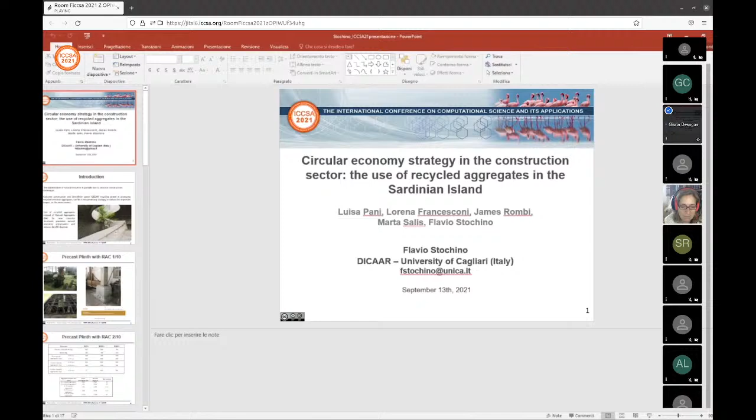Thank you very much, Professor, for the presentation. So, first of all, the co-authors of this work are Luisa Pani, Lorena Francesconi, James Rombi, and Marta Salis. We all work at the University of Cagliari here in Italy, and I'm glad to present this work at this very interesting conference.

So concrete is the most common construction material, and for this reason, the deterioration of natural resources is also partially due to its use. However, concrete construction and demolition waste recycling can be used for the production of recycled concrete aggregates.

Finally, of course, if we use recycled aggregates made with construction and demolition waste, we can save natural resources and we can reduce landfill disposal.

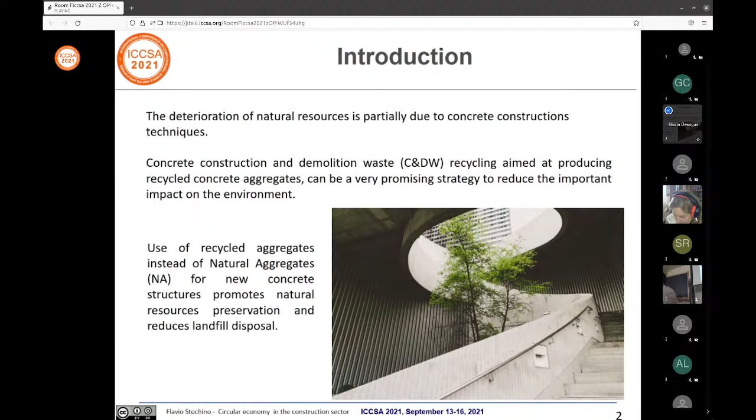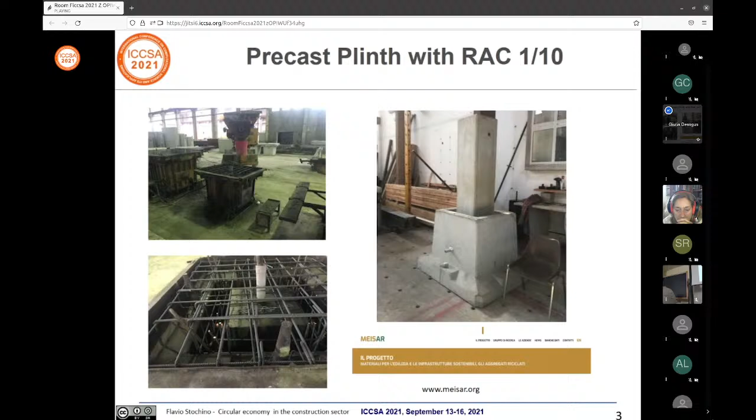In the framework of the research project MEISAR, funded by Regione Autonoma della Sardegna and coordinated by Professor Pani, we have tested the mechanical performance of a group of structural specimens, like reinforced concrete plinths, made with and without recycled concrete aggregates, in order to test the mechanical differences between the use of this material and the use of natural aggregates. In this slide, on the left, we have some details of the casting of the plinths, while on the right side you can see the whole structure.

We have prepared 3 specimens with different mix designs. The first one, labeled RC0, has only natural aggregates, so in this case we don't have any recycled aggregates, while RC30 and RC50 denote respectively a mix design in which we have 30% and 50% of recycled concrete aggregates. This is the replacement percentage of recycled aggregates instead of natural aggregates.

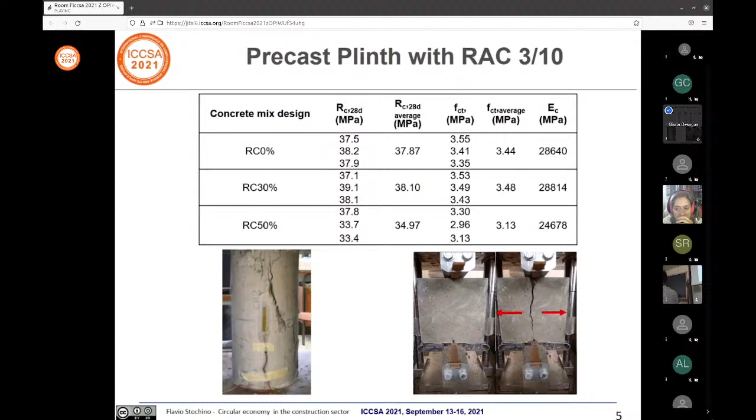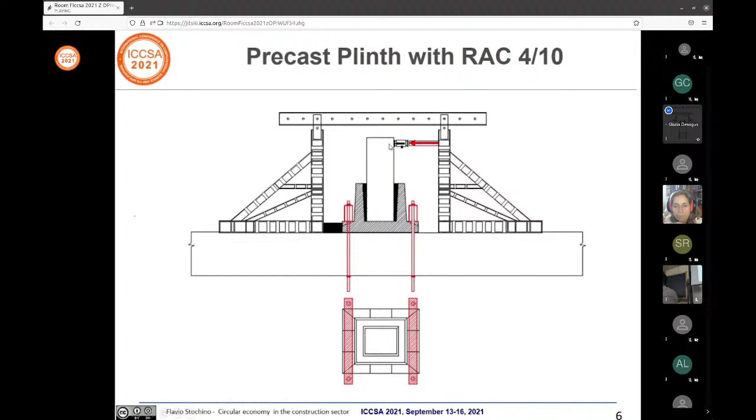Here you have some details of the experimental apparatus. The plinths are fixed to the ground, and there is an ordinary reinforced concrete column inside the plinths necessary to apply the load. We applied a horizontal force on the top of the column that is transmitted to the other part of the structure.

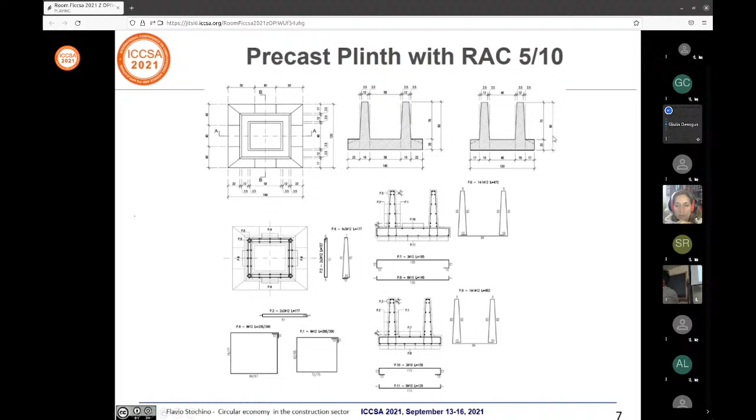Here we have the details of the plinths with some reinforcement bar characteristics, and the geometrical size of the plinths, which in plan are 1.4 by 1.2 meters, while the total height is about 90 centimeters. Here you have the position of the displacement transducer, shown by the red arrow, and the position of the hydraulic jack.

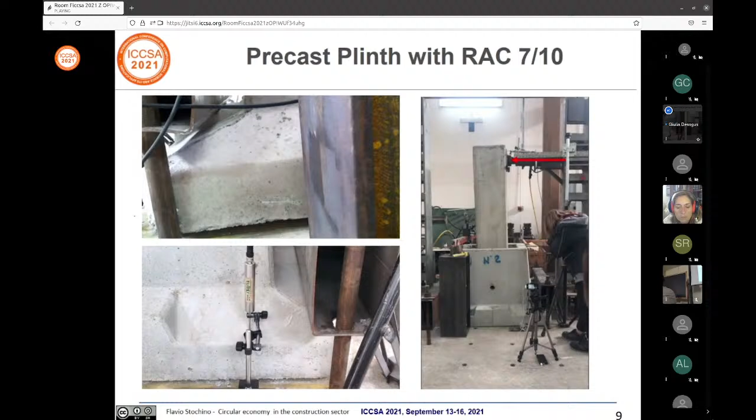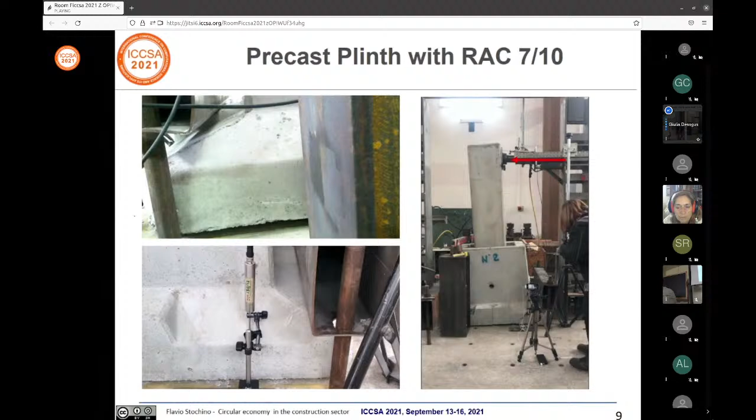Here we have a video of the experiments. On the right, you can see how applying and increasing the load on the column, we get an inclination and bending deformation of the whole structure, while the collapse mechanism is shown on the left, filmed from the opposite side. You can see crack propagation on the bottom cantilever part of the plinths, which became bigger as we increased the load until total collapse.

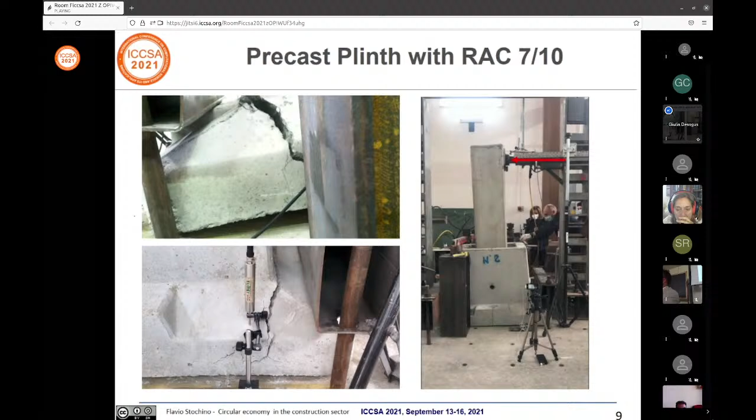There is no difference in the collapse mechanism for the 3 specimens, because all of them present the same collapse system. Here we have some quantitative comparison between the 3 specimens.

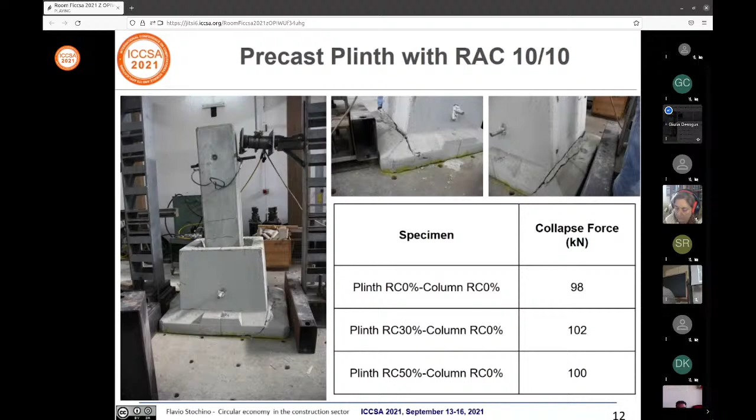Once we have proved that it's possible to use recycled concrete aggregates to obtain structural specimens, we can extend this and try to depict a general framework for circular economy development. As you know, we live on an island, which is a very interesting site to test circular economy, particularly for the construction market, where the cost of material is very low compared to the transportation cost.

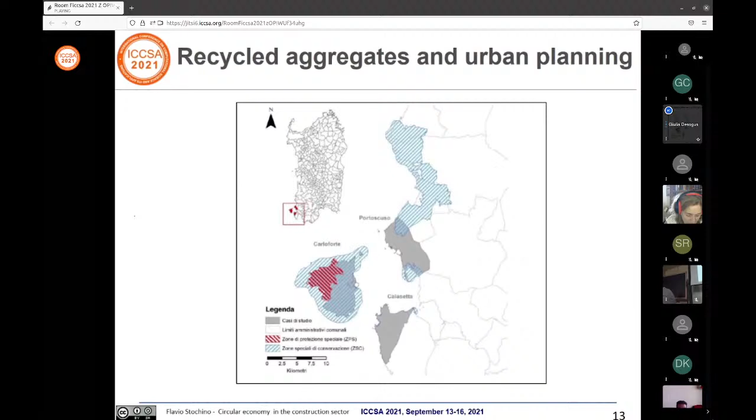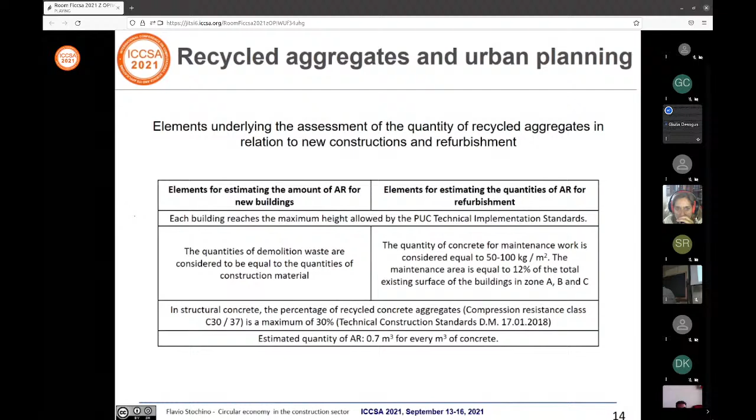Thank you. Okay, named Calasetta, Portoscuso, and Carloforte. In particular, we have developed a logical framework to analyze the urban development plan for all the municipalities, in order to determine, in the second phase of the analysis, what is the local demand for recycled concrete aggregates, considering new construction, refurbishment of existing buildings, and cycle and pedestrian paths.

You should take into account that these are three cities characterized by a touristic economy in which natural attractions are very important. In synthesis, for new construction it is necessary to have 2 tons of recycled concrete aggregates per square meter, which becomes 0.1 and 0.5 if we consider refurbishment and cycle and pedestrian paths respectively. In the bottom part of the slide you have all the details of the calculation.

In conclusion, potential application of recycled concrete aggregates in structural elements has good effects on both environmental and economic aspects. Imagine if the producer of precast plinths could use the production scrap as recycled aggregates instead of natural aggregates, saving money and also saving the environment.

We have proved experimentally that the presence of recycled aggregates as a replacement of natural ones does not lead to any reduction in the mechanical performance of the structures. Finally, we have shown a brief analysis about the possible recycled concrete aggregate demands of 3 towns in Sardinia, and we have calculated the amount of recycled aggregates that will be needed in this area.

I'm on time, Professor? Yes, you are. Thank you very much, thank you for the nice presentation.

The critical dimension, especially for island regions marked by resource scarcity, makes it very important to be able to use this kind of material in the construction sector. So, any questions from the audience, please?

I have just a consideration, if I can. Yes. So do I have to move? No, just a consideration.

I think that studying methodology to recycle materials is really important for the insular context, also because in this way we can speak about circular economy. Congratulations for your work, also because your specific field is structures, so there is multidisciplinarity in the session. Thank you, Chiara, you let me answer with this consideration.

As I was trying to express, it's very difficult for me knowing where to watch, because I don't know exactly - maybe this is the camera. Okay, so I was highlighting that for concrete, the cost of materials is very low.

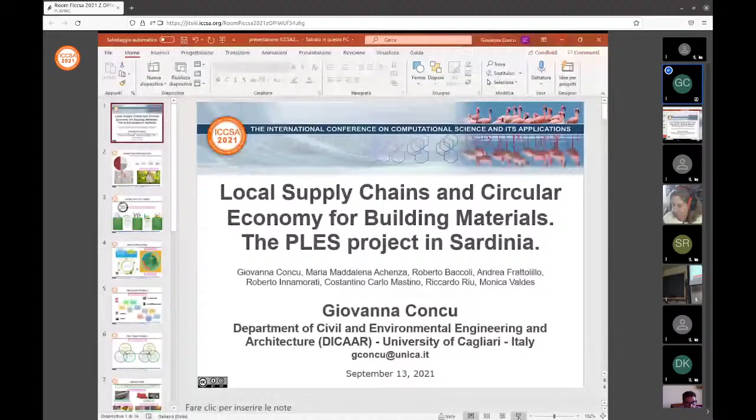I'm going to talk about the PLES project, which carried out a feasibility assessment of a local supply chain startup to produce building materials and eco-sustainable construction systems in Sardinia Island.

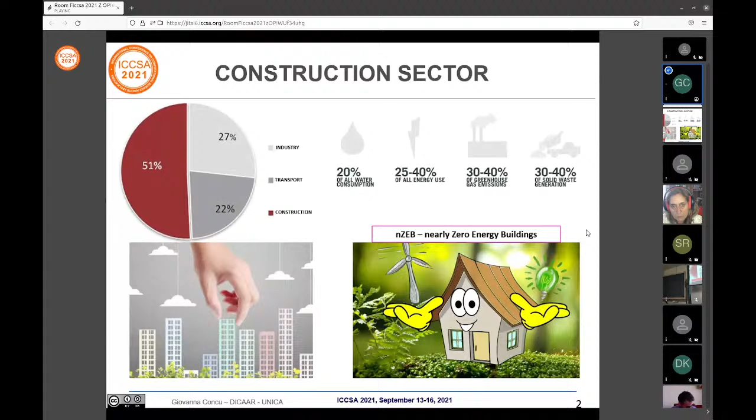I'd like to start by highlighting the impact of the construction sector on the environment. This sector currently is globally responsible on average for over 35% of the consumption of raw materials, soil, water, and energy, and for over 30% of pollution and production of waste. Moreover, all new buildings built in Italy will soon have to be nearly zero energy buildings, that is, buildings with almost zero energy needs.

In this context, the sustainability of building materials is of fundamental importance, and local supply chains take on a strategic role. The reduction of the environmental impact of a green building can be achieved with various strategies, including the more widespread use of eco-sustainable materials locally produced.

The resort to local short supply chains to produce building materials is particularly appropriate in a context of isolated economies, as Flavio highlighted, such as those existing in island regions like Sardinia. Many European islands are small isolated systems with small markets, so they are more vulnerable to the effects of anthropic impact, and must produce a considerable effort to implement strategies to reverse this situation. Therefore, it is essential that islands manage their resources sustainably to become increasingly efficient, self-sufficient, and to protect their environment.

Indeed, insularity could become an opportunity to implement self-sufficiency paths in the production and management of resources, to make the economy more sustainable. The PLES project fits into this context.

PLES stands for, in Italian, Prodotti Locali per l'Edilizia Sostenibile, in English, Local Products for Sustainable Buildings. It is a project funded by the local authority, Sardegna Ricerche, and it is based on the synergy between a multidisciplinary research group of Cagliari University and a group of local companies involved in various business sectors.

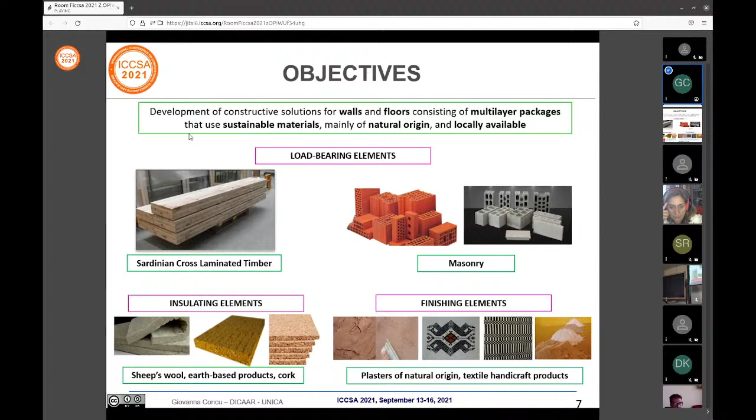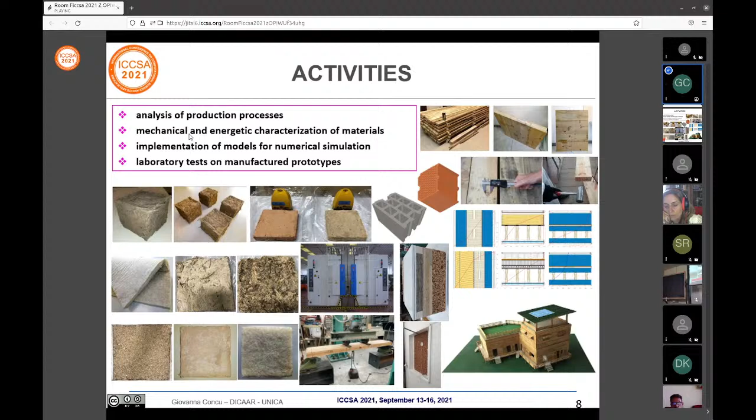The PLES project was developed through a series of activities you can see in this slide, which I will illustrate in detail in the next slide. The first was the analysis of the production processes, followed by the mechanical and energetic characterization of the materials involved, then the implementation of models for numerical simulation, and finally the laboratory tests on manufactured prototypes of the multi-layer packages.

The starting point of the project consisted in the analysis of the production processes related to the materials and construction systems considered. This analysis was run with reference to the life cycle assessment model and made it possible to highlight the consumption of energy, primary and secondary resources, and the emissions and production of non-recyclable waste. The impacts were assessed in terms of economic, environmental, and social sustainability, and the main aspects associated with both the production and marketing of the individual products were highlighted.

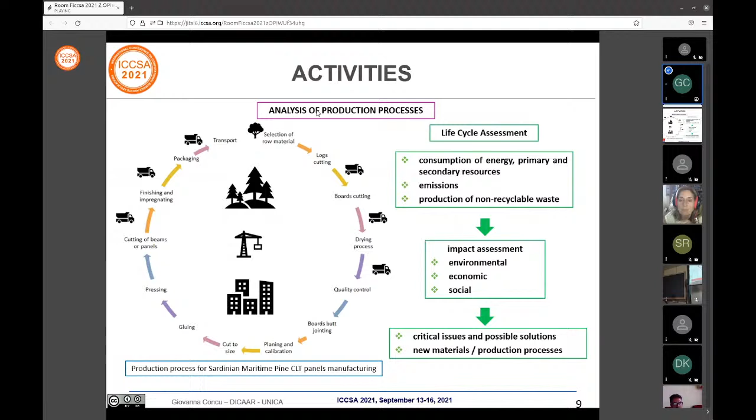This phase allowed, on the one hand, to highlight the main critical issues associated with the various production processes and to indicate possible solutions. On the other hand, to propose the development of new materials or new production processes, and the optimization of the already existing ones.

The project also involved the implementation of numerical models to simulate the performance of the multi-layer packages and of the single constituent layers. This activity mainly consisted in the development and implementation, by means of calculation codes and commercial software, of numerical models for the simulation of the mechanical and thermoacoustic behavior and the calibration according to the experimental results.

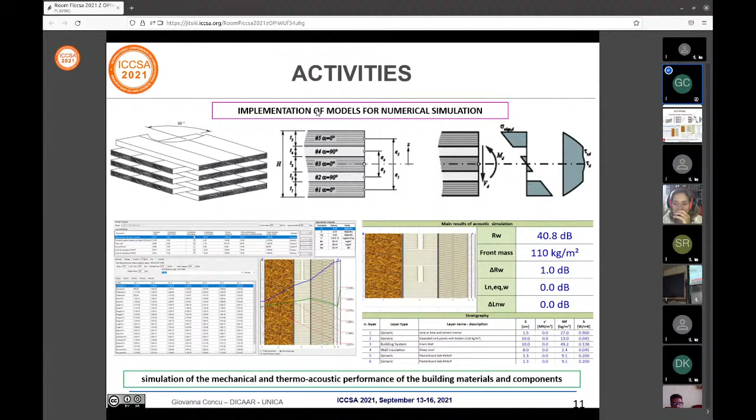The mechanical and energetic properties of the tested materials and construction systems tested during this last step of the project were also collected and implemented according to the procedures provided for compatibility with the Building Information Modeling Protocol. Through this coding, a database was created with the aim of promoting the marketing of local products and their use by designers and customers.

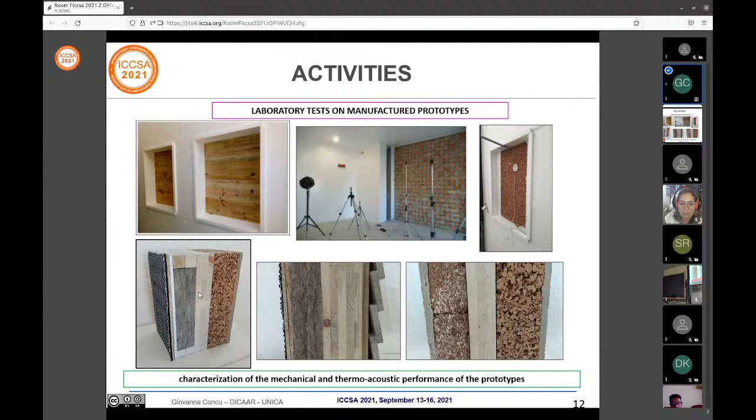2 minutes left. Yes, thank you.

Here are the results. The main results achieved by the PLES project are listed in these slides.

From a general point of view, the boost to the development of the Sardinian wood supply chain for structural use - all the timber used in Sardinia is now imported from abroad. Then the support for the diversification of the production and destination of traditional materials, such as sheep's wool, raw earth, and cork. The impulse to the development of the production sector of derivatives from vegetable fibers and of fabrics to be used in the construction sector.

The increased competitiveness and innovativeness of the artisan enterprises potentially interested, the development of new production processes, and the optimization of the existing production processes, also through the application of innovative tools and technologies.

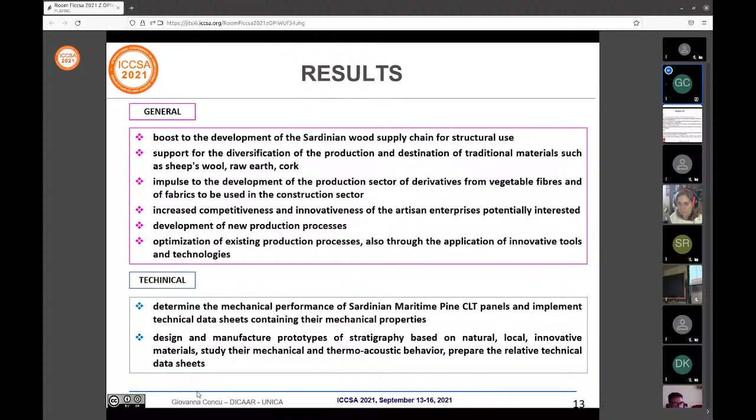From a technical, practical point of view, the project has made it possible to determine the mechanical performance of Sardinian maritime pine cross-laminated timber panels, and consequently to implement technical data sheets containing their mechanical properties, which can be used to encourage the production and use of this new material, and to design and manufacture some prototypes of stratigraphy based on natural, local, and innovative materials, to study their mechanical and thermoacoustic behavior, and to prepare the relative technical data sheets.

All the activities, the contents, the results, and the products of the PLES project have been implemented on a freely accessible dedicated website to provide a solid basis for the implementation in Sardinia of local supply chains for the production of eco-sustainable building materials.

In conclusion, the PLES project has represented the spark that ignited the start of a broader and more in-depth research to study modular vertical and horizontal closure systems for buildings, combining sustainable materials, mainly of natural origin and locally available. In addition, the project has taken a scientific approach to the intelligent and convenient use of local materials, both primary and resulting from primary processes, encouraging virtuous circular economy activities and enhancing regional material and human resources.

The project allowed the research group to define multi-layer modules that showed very interesting results concerning load-bearing capacity and physical performance, and the team is now continuing the research with the intention to define certified prototypes to be launched into the sustainable building markets. Thank you very much for your attention.

We thank you very much, Giovanna.

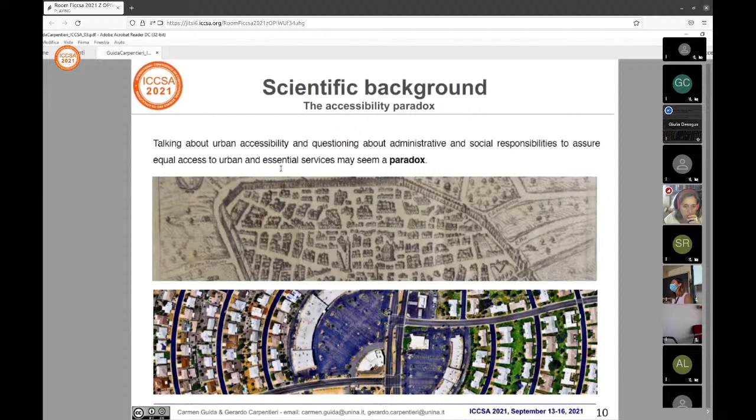Talking about accessibility for urban environments may actually seem a paradox, because cities were born to provide services and activities for a heterogeneous group of people. But today, talking about accessibility for cities is not a paradox anymore, due to social, economic and infrastructural crises that make the paradox only apparent.

Of course, the accessibility we refer to is not a place-based accessibility that just concerns transport and mobility matters, but takes into account the urban system as a whole, considering services and activities as well as personal and individual capabilities. These are some of the main definitions of the paradigm of accessibility.

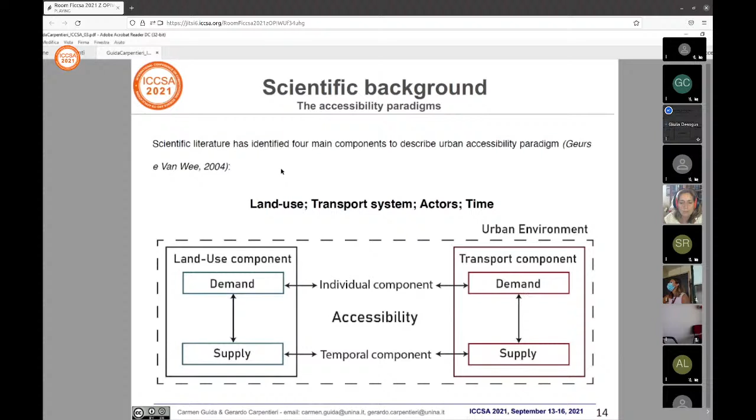We try to study accessibility measures, as a literature review convinces us that including accessibility measures in the urban planning cycle may be a good opportunity to make aware decisions and to monitor urban transformation towards aging people. There are four main components to measure accessibility: land use and transport system, both considering supply and demand, and also actors, considering individual characteristics of population as well as time.

These are some of the most known measures. We studied them and divided them into three main categories: contour measures, gravity-based measures, and utility-based measures. These are some reflections and thoughts that we try to summarize in order to build our own methodology.

One of the main traits is the significant support of GIS methods to analyze both the land use and the mobility component. On the other side, it seems that holistic vision seems to miss accessibility measures. Another important trait is the spread of gravity-based methods, both in academic and professional fields. According with the scientific background and our reflections...

We try to develop a new methodology based on the two-step floating catchment area method, developed by Luo and Wang in 2003. It is a gravity-based measure, and it consists of two different steps. In the first step there is a ratio between supply and demand.

Supply is the number of services available in a study area. Demand is the population or the users that want to access the service. In the second step, the methodology evaluates the total accessibility, considering all services available from the origin.

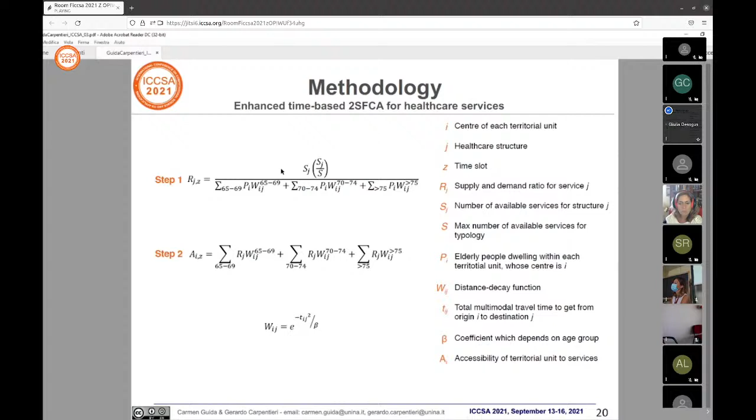Or the number of people that work in each structure or building. Another innovation: we consider a decay function to account for the different capability of elderly people to walk.

We consider a different walking speed in the evaluation of time. In fact, the decay function is a function of time for each age category. We consider, according with previous studies, three age categories: the young elderly, the medium elderly, and the old elderly.

Our decay functions range between 1 and 0. The maximum travel time that elderly people want to spend to reach a service is more or less 30 minutes for a young elderly person and 20 minutes for an old elderly person.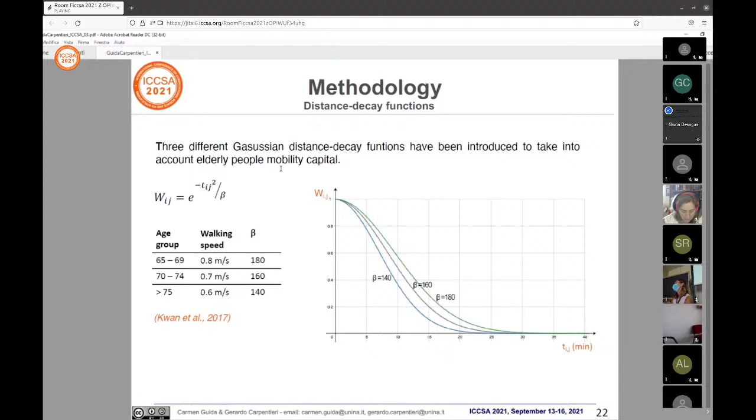For visualizing the results, according to previous studies by Transport for London, we propose a 10-quantile classification of accessibility.

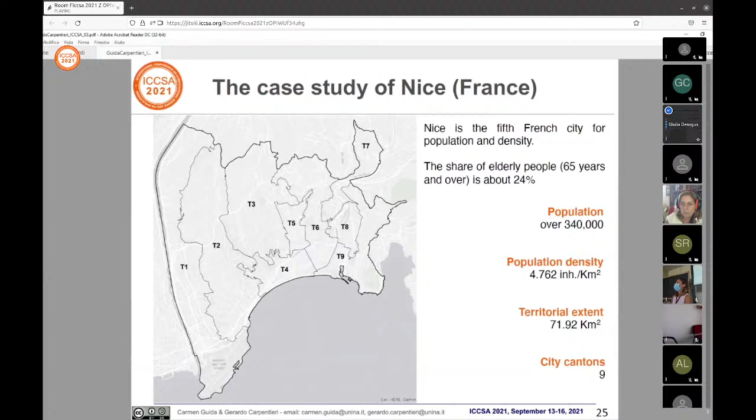We apply, in partnership with the University of Côte d'Azur, the methodology to the city of Nice in the south of France. The city is divided into 9 districts, and we consider the primary health services located in the city. There are 20 different buildings where the primary health services are located.

This is the distribution of elderly people in the city of Nice, and the local authority has invested in recent years to improve the quality of the health system for elderly people, developing a specific plan to analyze elderly access to primary health services.

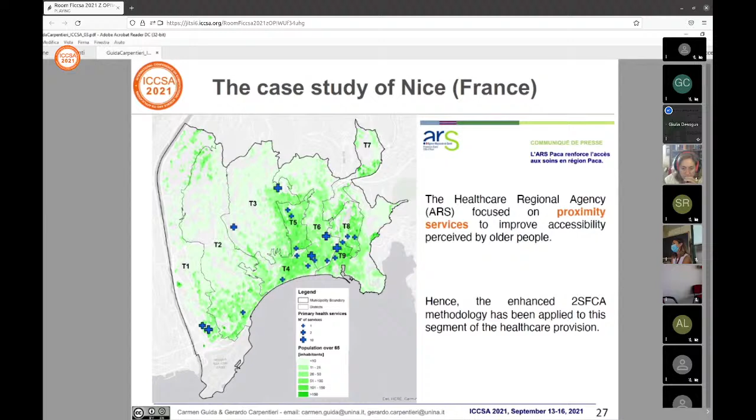So we apply our methodology over 3 daily time intervals. This is the morning scenario, with a maximum number of primary health services open, and with a maximum value of the transport system. On the right of the slide, there is the result for each district in terms of number of people and level of accessibility.

This is the afternoon scenario, with the same buildings open, but a changed transport system. And this is the last scenario, the evening scenario, where only 3 building services are available in this time interval, and there is a reduction of transport services.

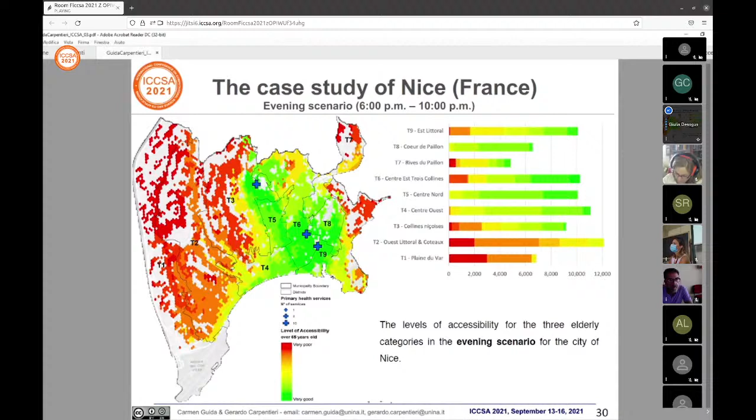It's possible to see from the map that the west-north area of the city has a low value of accessibility.

In conclusion, we'll present the main results of our research. One of them is the innovative feature of integrating accessibility measures with informative tools to support policymakers in identifying solutions to improve the quality of life of elderly people, also in emergency scenarios, and to quantify their consequences, including in what-if scenarios.

Another key feature of our research is the consideration of the actual mobility capital of the elderly, considering walking speed, transit, and distance decay function.

The application of the methodology to the case study of Nice proved that urban planning tools and decisions by policymakers may be guided by accessibility measures. Further steps of our research will integrate this method within a WebGIS, a spatial server, in order to visualize and elaborate data in real time to support policymakers.

For further insights, here is a book we published last month, at the end of July, which takes into account this research and other parts of it, including the application of some of the methods we presented today, in its latest version, to the cities of Naples and Milan.

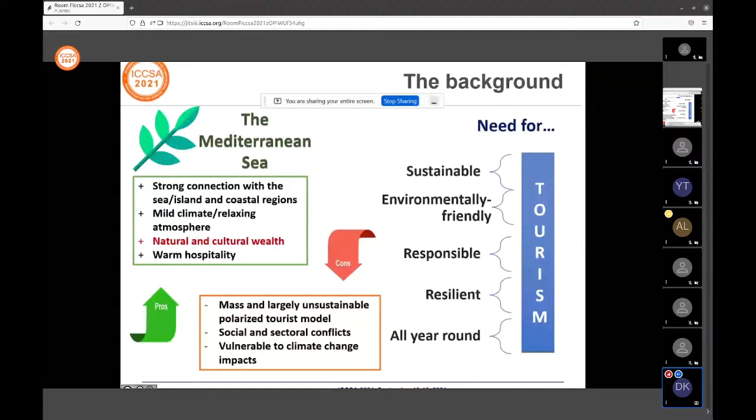This calls and prompts call for immediate action towards a more sustainable, environmentally friendly, responsible, resilient, and all year-round tourism model. The answer to these needs and the special focus of this work is diving tourism as an activity falling into the maritime tourism alternative forms.

It is an evolving niche market, counting more than 27 million certified divers between 1967 and 2018, falling at the same time to a more personalized, sophisticated, experience-based tourism form, a need that has already been expressed by both the demand and the supply side of the tourism sector.

It is taking place mostly in sites with a natural and cultural wealth, and here is the underwater cultural heritage aspect that is a prevailing feature of the Mediterranean underwater world, and the special focus of our research. And at the same time, it's an all-year-round activity with significant potential.

This potential is not yet fully exploited today, especially in the Mediterranean islands. But...

What is underwater cultural heritage? According to the definition, it includes shipwrecks and plane wrecks, mostly the ones that are related with historical facts and events like World War I and II.

Artifacts, structures and deposits buried or submerged, originated from human activities on land. Artifacts, structures and deposits originated from inhabitation or use of coastal zones.

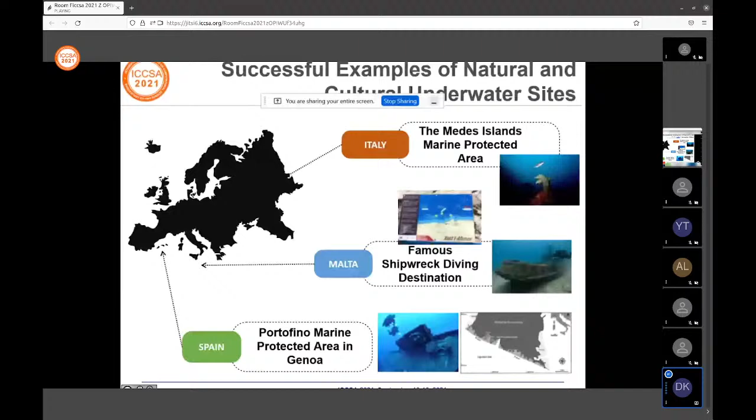Moving forward to the Greek example, Greece is one of the most coastal and island countries in the world, as you can see in the slide. At the same time, it hosts significant underwater cultural heritage sites, such as 2,000 wrecks, as an outcome of Greece's strategic geopolitical position and its role in World War events. Although this underwater cultural heritage, both natural and cultural, is highly acknowledged, it is not fully exploited today.

This is mainly due to the fact that for several years, diving activity was restricted, rendering accessibility of many potential diving sites totally prohibitive. In 2003, a ministerial decision characterized all shipwrecks submerged for over 50 years as monuments, a fact that increased the inaccessibility of the sites.

The situation steadily started to change after 2005 with the introduction of accessible underwater ecological parks, as well as a recent law in 2020 defining diving tourism as one of the main special forms of tourism to be developed in Greece. Unfortunately, till today, because it's a very recent regulation, the results are not visible.

Although accessible underwater ecological parks seem an important institution to ensure protection and sustainable exploitation of UCH sites, there are only 4 established till today in Greece, attracting the interest of many visitors. Here we name the Methone Bay in Sapienza Island, the Navarino Bay in Peloponnese, the Pavlopetri in Laconia, and the UAP at Alonissos in the North Sporades, which I think is the most well-known today.

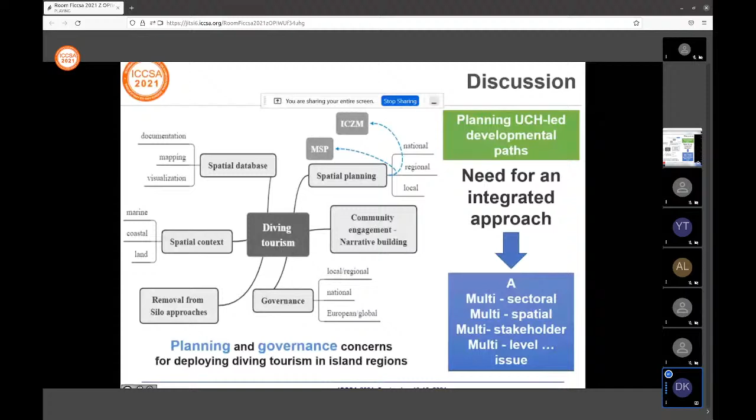To conclude, diving in UCH sites has attracted significant interest from a demand and supply side, being a driver towards local sustainable development based on a healthy and wealthy marine environment. UCH nature, being part of a complex ecosystem, the coastal and marine one, sets protection complex and in many cases a local issue of high concern.

Speaking of the Mediterranean, insular territories are already recognized as globally attractive diving sites, rendering the potential towards a more environmentally and culturally responsible, high-class, all-year-round and experience-based tourism model. The examples examined show a significant effort towards sustainable exploitation, and at the same time the protection, management, and control of existing natural and cultural reserves.

This is not so common in the case of Greece, which, although endowed with various and important natural and cultural submerged sites, the lack of national maritime spatial policy sets UCH at risk. All the above sum up to the conclusion that planning UCH for developmental purposes can be a wicked planning problem, especially for planners who come up against various challenges of an unmapped and unknown environment with unique characteristics and complex dimensions.

Thank you very much for your attention, and I remain open for any further questions.

The title of this presentation is High Resolution Spatial Data Analysis for Monitoring Urban Sprawl in Coastal Zones, and the case study that we'll present is Crete Island.

Coastal zones lie at the interface between mainland and the sea, and this makes them very interesting and at the same time a critical field for urban and regional analysis. These are areas heavily affected by urban development, and particularly vulnerable to environmental degradation, not to mention climate change, coastal erosion, and other important issues. So it is our belief that monitoring and regulating land use changes in these zones becomes more and more critical through time, as spatial conflicts occur in these areas, and it's not at all easy to handle them.

So when we speak about the Mediterranean case, we could say that the special fact of the Mediterranean coastal areas is that at the same time they are heavily affected by mass tourism development patterns.

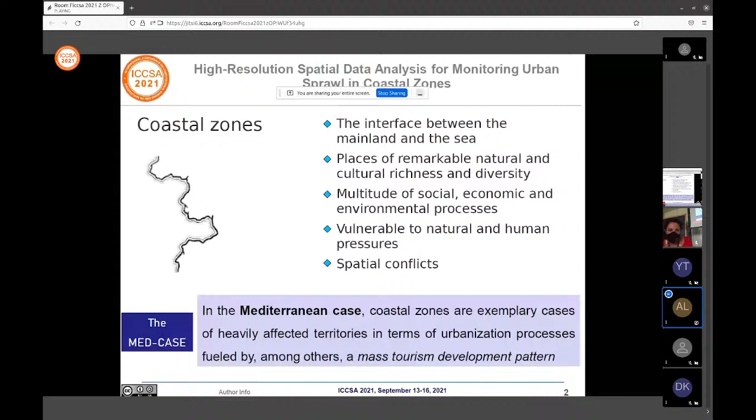So these are two keywords that lie at the core of this research: the first one is coastalization, and the second one is urban sprawl. It is our opinion, drawn from our conclusions, that these go together in many Mediterranean coastal areas. So what is coastalization? It can be defined as an intense linear form of urban development taking place along coastal zones.

We speak about urban development, we speak about transport infrastructure in these areas, and also we speak about cities that are created by and for tourism.

At the other side of the coin is urban sprawl. Urban sprawl is related to a large-scale artificial land expansion, accelerated dispersion of low-density built-up areas. It is characterized as an unplanned and poorly regulated urban development model.

So these two processes, coastalization and urban sprawl, are really dynamic in the Mediterranean case, and they pose extreme pressure on the vulnerable Mediterranean ecosystem.

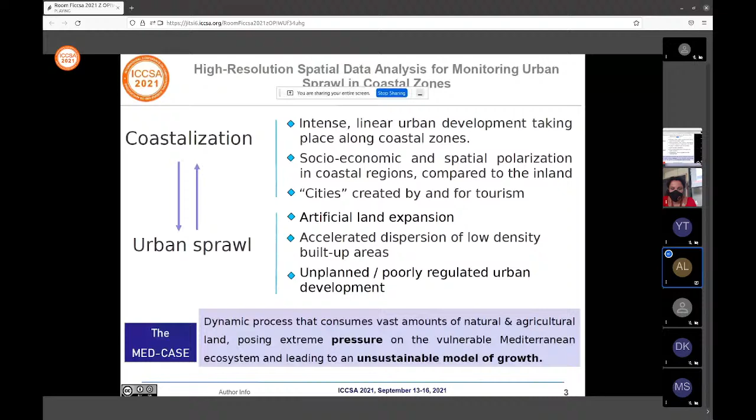The viewpoint of this research is to apply geospatial methods, taking advantage of high-resolution spatial data, to evaluate what is going on in these areas and analyze built-up patterns in order to characterize the degree of urban sprawl.

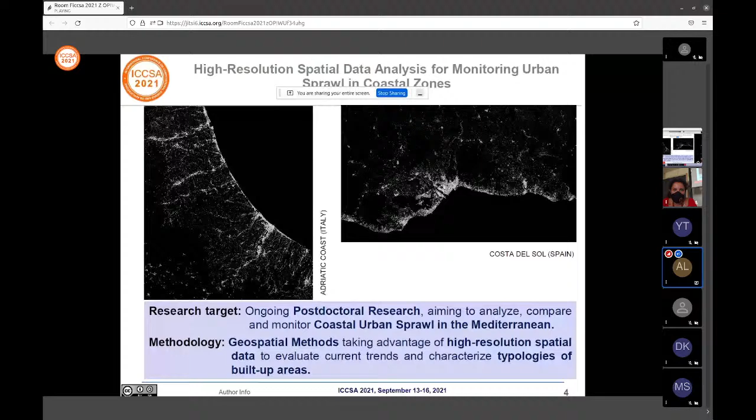The focus of this research is on an island territory, because Mediterranean island territories are considered as distinct cases of fragile and vulnerable ecosystems. Usually they are heavily affected by urbanization and tourism, and they have a confined space and usually limited carrying capacity.

So it's really crucial to analyze.

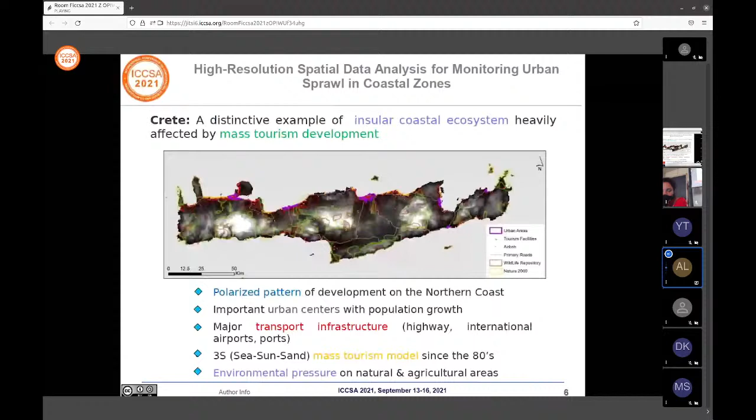So I'm going to go through the methodological issues handled in this research. First, by noticing that, in my opinion, there is a big, up to now, data problem. So what was the problem? The problem is that we didn't have high resolution data.

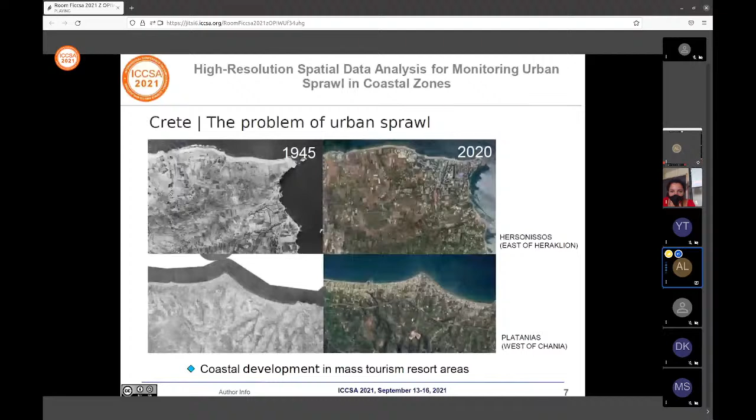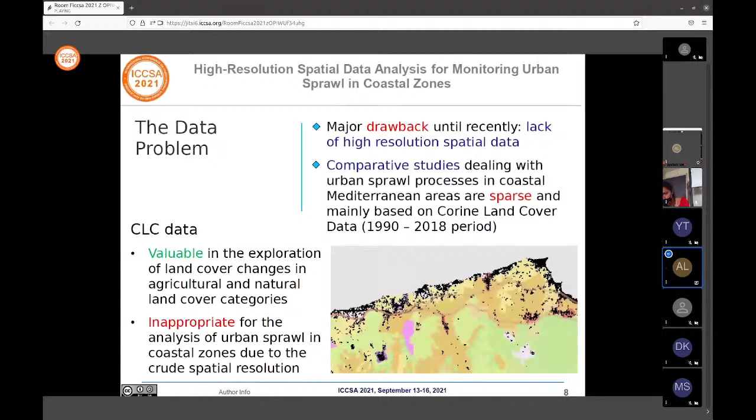So results can be confusing and in many cases misleading. So what we do is take the global human settlement layer, first using the multi-temporal data at 30 meters resolution, covering the period of the past about 40 years. And then we use the high resolution, the most recent data for the period 2017-18 at 10 meters resolution, to analyze the structural and morphological attributes of urban sprawl patterns.

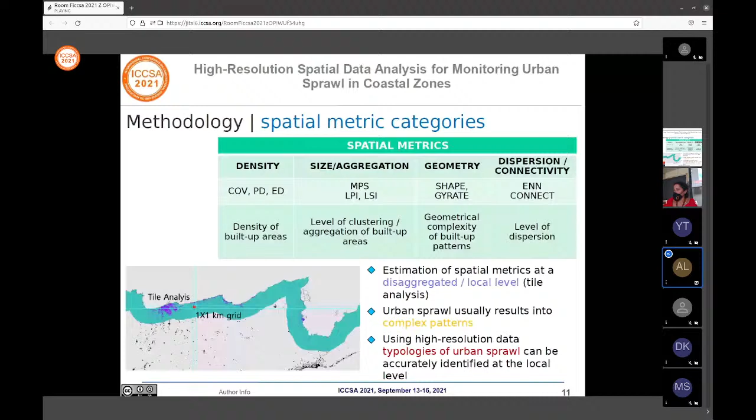I'm going to go to the case study. Crete, you can see a 3D view from the northern coast. It is an island with important natural, archaeological and cultural sites. About 45% of the island is covered by Natura 2000 areas. You can see the green areas here, and many of them are really close to the coast.

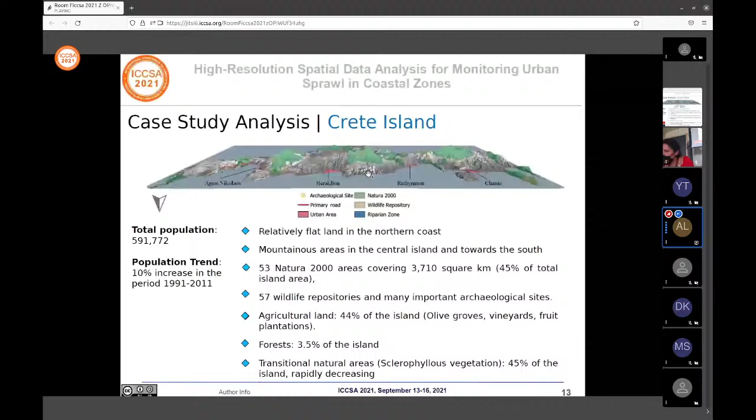What is happening since the 80s is that large-scale tourism investments have been made mainly along the northern coast, based on an international tourism model, rapidly changing Crete towards a tourism-dependent economy. For example, we have about 2,000 hotels and 18,000 registered Airbnb rooms, apartments and houses during the past years.

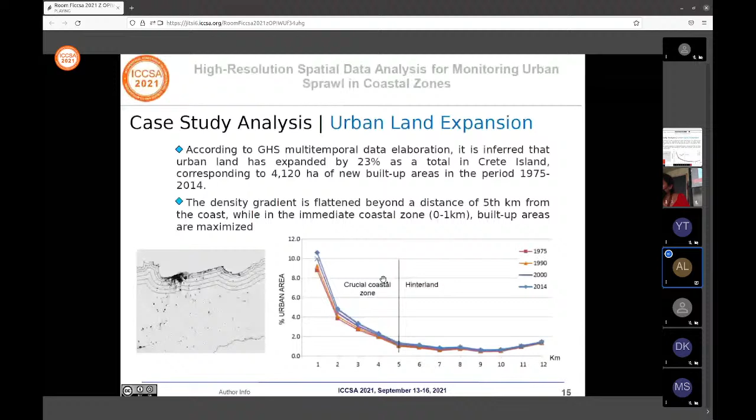So what we did is estimate how this density gradient fades from the coast. This is the coast, and then we move towards the hinterland and analyze the density of built-up areas, identifying which is the crucial coastal zone, 5 kilometers from the coastline.

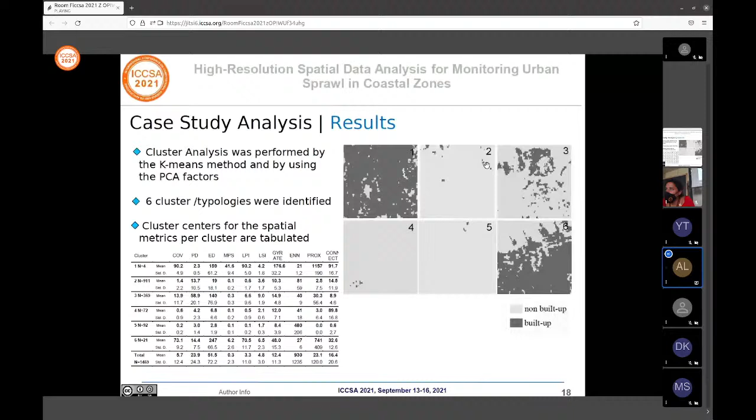After having done all this analysis, this process, we are able to identify in the case study area 6 main clusters, typologies of sprawl and built-up areas. You can see here with the black and white how these typologies look like, and then we have mapped these typologies across the northern coast of Crete.

I'm going to go really quick. Point your attention to cluster 3, which is the magenta color. If you see the magenta areas, these are the areas mostly affected by urban sprawl, as revealed by the quantitative analysis we made on the patterns of development. Cluster 2 typologies, which are the blue, are classified as transitional areas with low density scattered development.

The other typologies include areas that are densely built-up urban areas, and areas that are not yet affected by the urbanization and tourism development process.

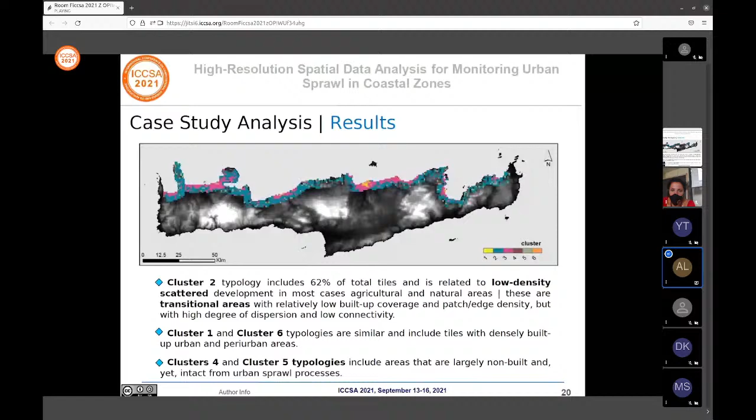I'm going to go through the major findings of this research. We see that the case study area is heavily affected by urban sprawl, and 25% of the northern coast is classified as intense urban sprawl, and in my opinion immediate action should be taken in these areas. There is another 62% of land classified as transitional areas, which will work in the future as buffer zones of development. So we need to handle this issue too.

I would conclude by saying that monitoring coastal urban sprawl is really important, as it could provide the ground for better informing decision-making processes towards sustainable development. This methodology we created could be extended in the future to other areas in the Mediterranean, and help create a comparative framework for understanding and evaluating current changes.

The following slides will cover some issues of this research. There will be a short introduction covering pavement layers, cement, alternative materials, and circular economy. Then I will talk about the aims of the research, the case study, the tests conducted and results, and finally conclusions.

Cement is widely used in civil engineering. In 2019, the annual production was 4.2 billion tons, producing 1.4 billion tons of CO2 per year, about 8% of the total CO2 emitted in the atmosphere. Half of this CO2 derives from fossil fuels used to heat the kilns, and the other half is produced through the calcination of limestone.

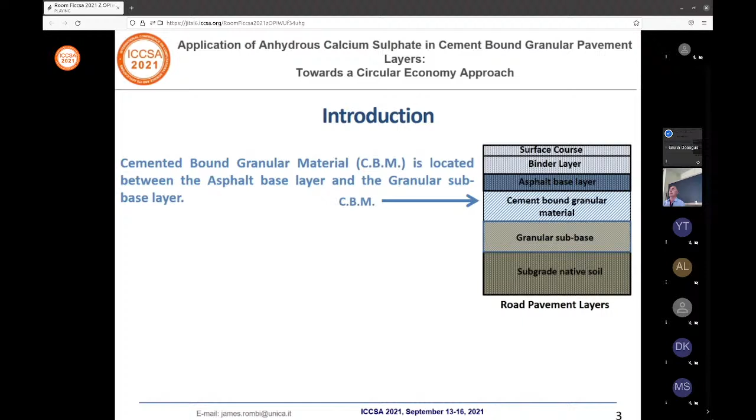Cement is used for many applications, for example in road pavement layers as a binder in cement-treated layers. In this research, we analyzed the cement-bound granular materials located between the asphalt base layer and the granular subbase. Cement-bound granular materials usually contain 5% cement mixed with granular aggregates and water.

In the road construction industry, there are many alternative materials used to promote a circular economy approach, based on reused materials and minimizing waste. Some examples are construction demolition waste used as an alternative to natural aggregates, or rubber from tires, plastic, glass, or byproducts like fly ash. In this research, we analyzed the potential applications of anhydrous calcium sulfate, which derives from a byproduct of an industrial process.

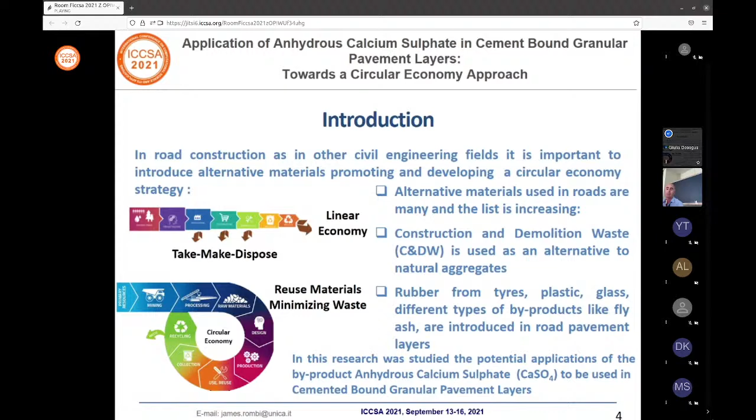The aims of this research are to verify the potential applications of anhydrous calcium sulfate in the road construction sector by partially replacing cement in the bound layers, obtaining a mix with the highest percentage of ACS while maintaining good mechanical and physical performance. Also, to verify if the mix design can be replicated in industrial plants for large-scale production.

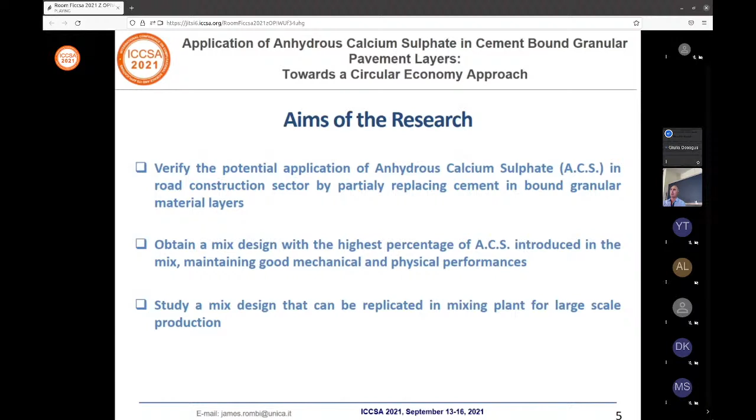The milled anhydrous calcium sulfate used in this research derives from a plant located here in Sardinia. It produces this byproduct from the process to obtain aluminium fluoride and cryolite, used in the aluminium industry. The average annual production of this plant is 240,000 tons per year. Here we can see the industrial process from which this material derives and its chemical composition.

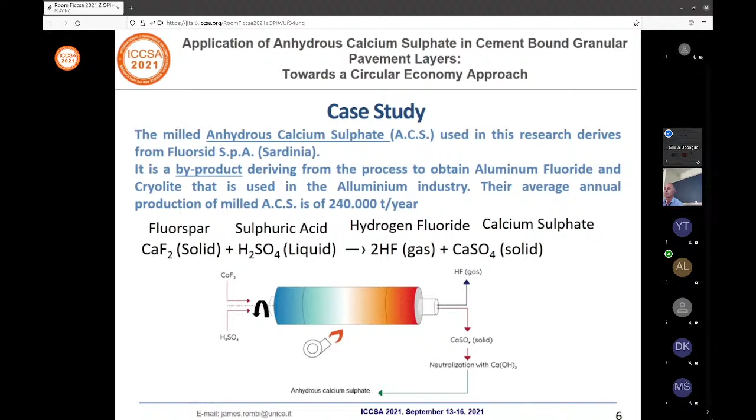The case study was divided into phases. In the first phase, laboratory tests were conducted to verify physical and mechanical behavior. Then, once the best mix design was obtained, a trial road embankment was constructed to verify its behavior in real working conditions.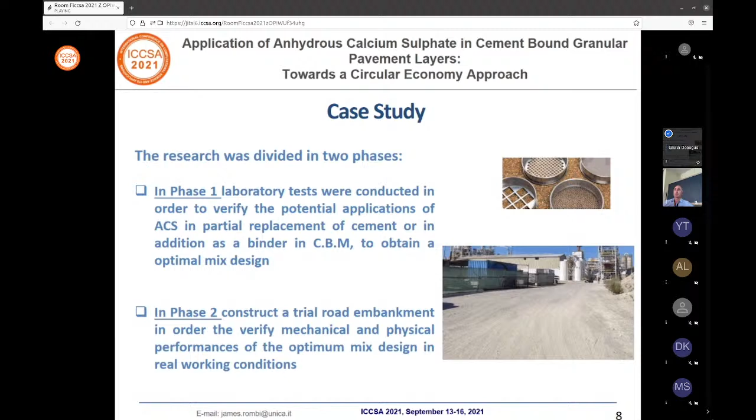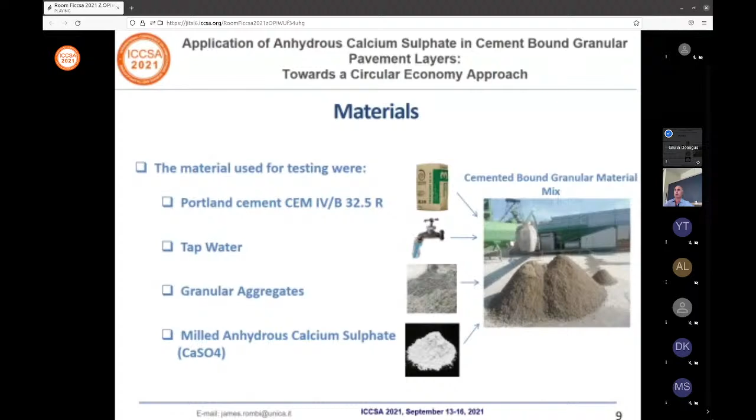The materials used in this research are cement, water, granular aggregates, and milled anhydrous calcium sulfate in order to obtain a mix.

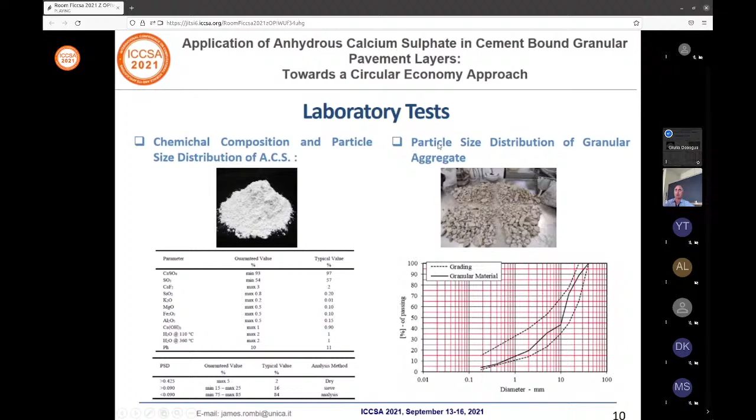Other tests conducted included the modified Proctor test to verify the optimum water content for each mix, and here are some samples that were tested. These samples are cylindrical specimens, 150 millimeters in diameter by 200 millimeters high. They were cast, cured, and tested at 7 days.

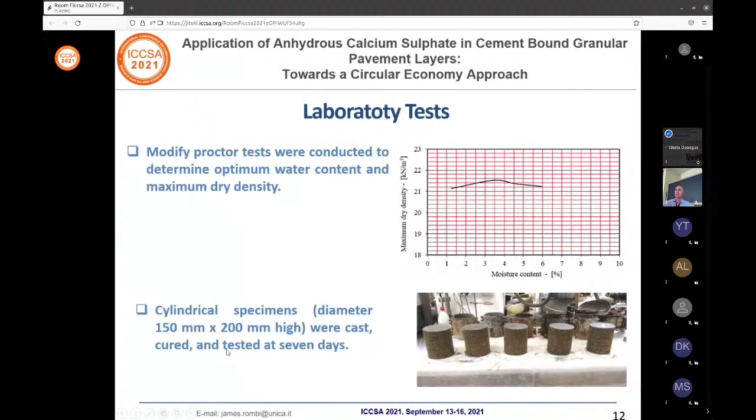The tests conducted at 7 days were unconfined compressive strength, as we can see here in this chart with upper and lower limits, and all the mixes were inside these limits. We also tested indirect tensile strength, and only in one case was this not in accordance with specifications.

Here we see which mix design was chosen to verify the mechanical behavior in real working conditions. This was chosen because it had the lowest cement amount and the highest quantity of ACS.

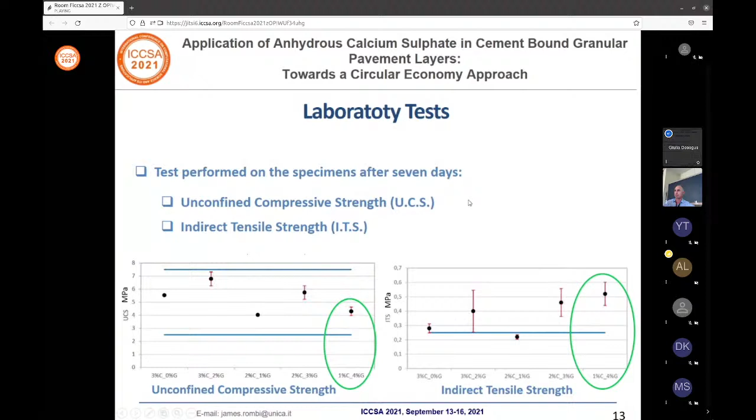In this slide, we can see the trial embankment project. It is 90 meters long, 6 meters wide, and divided into 2 sections. One section was called innovative because it had ACS inside the mix, and the other one was traditional, incorporating only cement. Here we can see in this cross section the thickness of each layer.

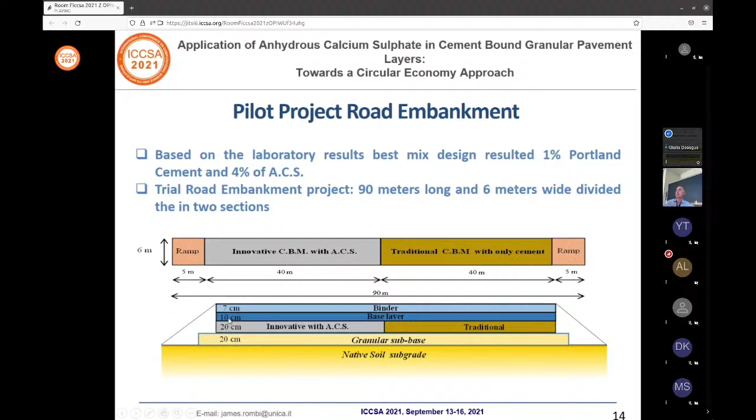We must say that on each of the constructed layers, bearing capacity was measured. That was very important to understand how this type of material behaves in real working conditions. It was measured using the falling weight deflectometer, used in pavement road testing to verify the elastic modulus of each of the layers that form the road.

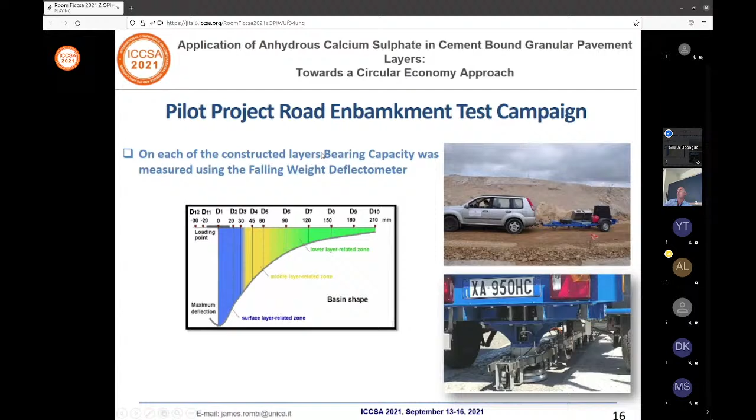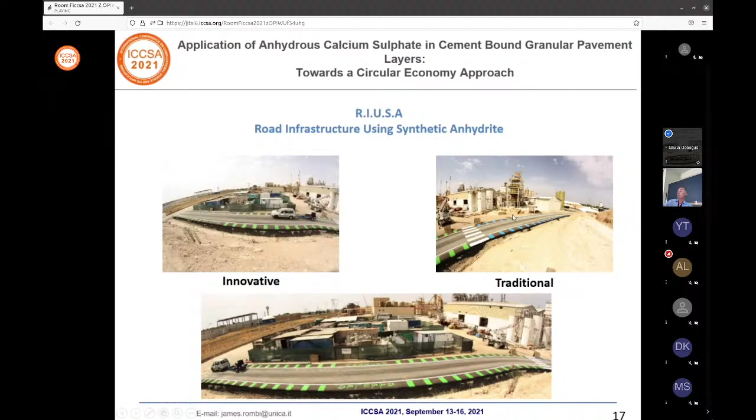In conclusion, we can say that the use of ACS combined with Portland cement can provide adequate values of unconfined compressive strength, reducing the amount of cement in the mix. This is also confirmed by the other mechanical test, the indirect tensile test, which gave excellent properties of the mixes.

During the construction of the pilot embankment, we had some issues that must be considered when laying this type of material. Optimum water content in the mix must be strictly respected, and the laying and compacting procedure must be done in a short period of time.

The falling weight campaign showed good bearing capacity of the innovative CBM layer. This material will also be monitored periodically to evaluate any loss of bearing capacity.

We must say that this road is now open to heavy traffic, and all the traffic that goes through this road is automated, weighed, and we know exactly what type of vehicle is going through the road. So we know over time how many vehicles have been through that road, and the capacity the road has endured.

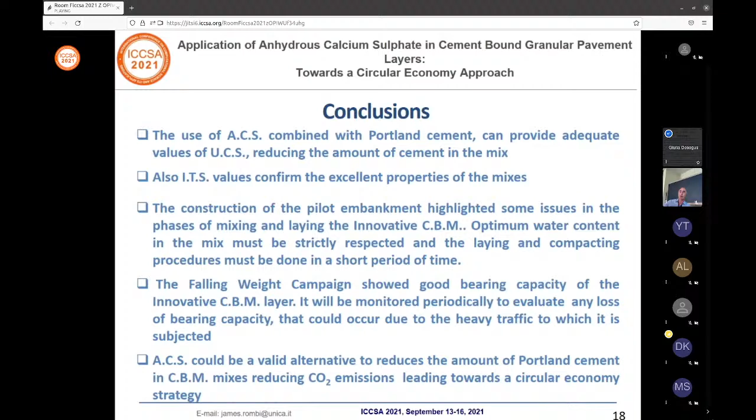Finally, we can say that the use of ACS could be a valid alternative to reduce the amount of Portland cement in the mixes, reducing not only CO2 emissions, but also leading towards a circular economy strategy. Many thanks for the attention.

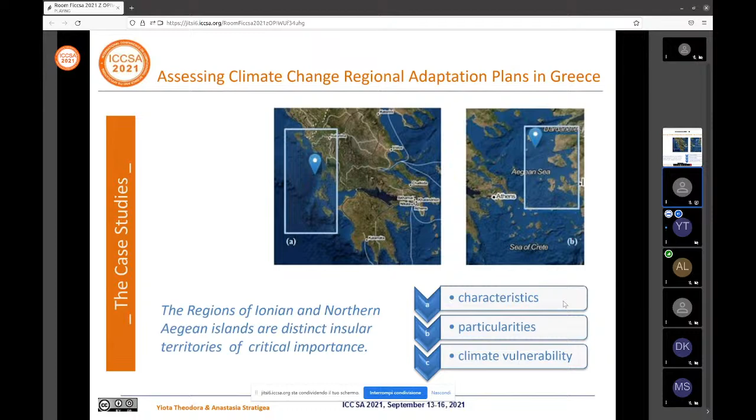Of critical importance also is their vulnerability due to their insular nature and climate change risk associated with coastal compartments. Dear Chiara, the next one, please.

Deep insight into the RAPs of the study insular regions unveils a range of weaknesses. Firstly, generality of targets - this is a serious omission confining RAPs' value in practice.

Secondly, RAPs' work is often based on outdated data, thus assessment of current state developments and updates as part of RAPs is questioned. Thirdly, generality of proposed measures and actions.

Other weaknesses of equal importance are loose or non-existent interconnection between RAPs and other spatial plans, limited orientation to social infrastructure, especially in education and health sectors, and insufficient consideration of the spatial dimension, so that coastal areas and built environment are largely underestimated.

Finally, another weakness is the emphasis given to administrative structure, regardless of climatic areas or spatio-functional specificities, in order to define the geographical areas of reference. Chiara, I need the next one.

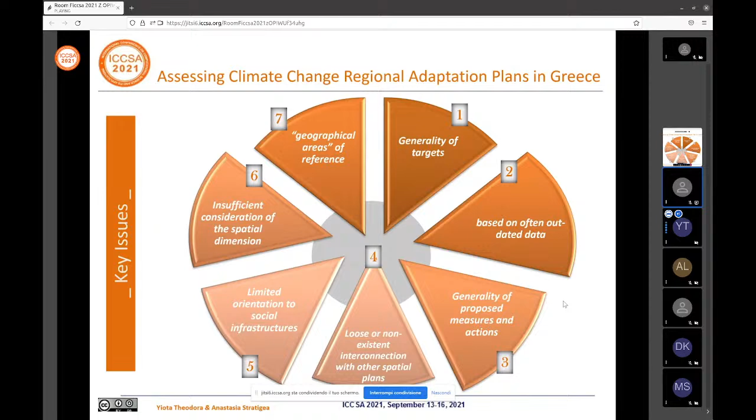Thank you. Additionally to the aforementioned weaknesses, the following concerns are noticed as well. First of all, RAP studies in this work hardly reflect the planner's rationale, in the sense of technical linkages among different stages, more spatial and developmental focus, and use of substantial participation schemes - all reflecting a lack of planning expertise in the synthesis of the respective RAPs working groups.

Governance in building up the study RAPs is loose, lacking vertical and horizontal interaction among all types of societal players. The value of public awareness raising and engagement throughout the RAPs process has not received relevant attention. And last but not least, a strategic view of the study region and a future vision to be reached is missing.

So there is no doubt that irrational use of natural resources through decades has changed the world's climate, making tomorrow's climate a huge challenge today.

Governments are currently deeply engaged in delivering national and regional adaptation plans in a systemic way. Insights into RAPs in this work, according to the authors, seem to be much more than before, though less than needed in such a highly threatened Mediterranean insular complex.